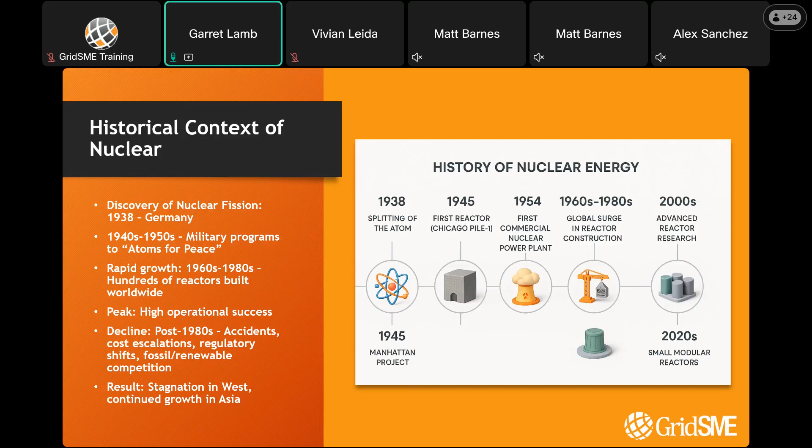So the current global energy landscape. As recent data from the International Energy Agency's Global Energy Review in 2025 shows, fossil fuels still dominate at nearly 60% of global electricity, with coal being the largest, but declining. Renewables hit a third, led by hydro, wind, and fast-growing solar. Nuclear contributes a steady 10% of electricity, but with record output in 2025 of over 2,600 terawatt hours.

Clean sources together reached two-fifths of electricity for the first time. Electricity demand grew over 1,200 terawatt hours in 2025, up 4%, far above historical averages, fueled by EVs, heat pumps, AI, data centers, and developing world industrialization. This creates urgent needs for reliable, low-carbon baseload, which is exactly where nuclear power excels and why it's needed in today's power grid.

Nuclear's comeback is driven by interlocking crises: climate science and regulations that demand slashing emissions per the Intergovernmental Panel on Climate Change, or IPCC, pathways that rely on low carbon and firm power.

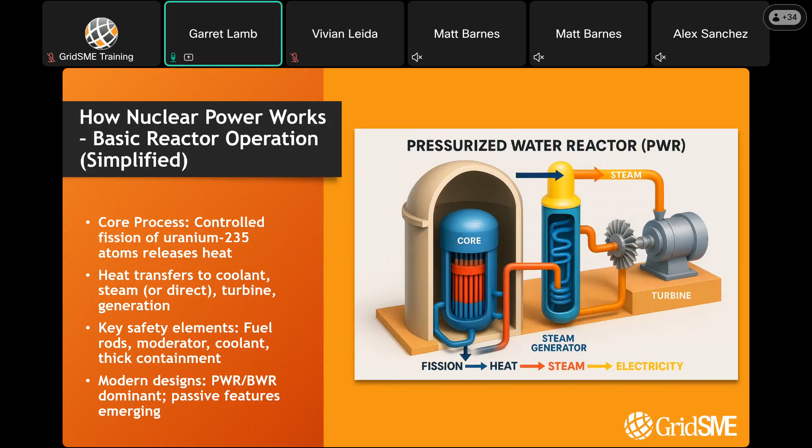Okay, so the advantage in climate emissions. Nuclear's full life cycle emissions, which include the mining of uranium, construction, operation, and decommissioning, are extremely low. Recent data puts nuclear at 5.1 to 6.4 grams of CO2 per kilowatt hour.

When related to the IPCC's median threshold at 12 grams, this is far below coal at 800 plus grams and gas at 490 grams, and pretty much similar to wind that generates 11 grams, while edging out solar PV at 45 grams. In many scientific studies, this accounts for everything from fuel supply to waste management.

Nuclear has collectively avoided massive emissions by displacing fossil generation. It's a proven on-demand decarbonization asset, which is essential for electrical generation across the globe.

And many of you are probably thinking, why is the emission so high on renewables? Well, it's the entire spectrum and life cycle of creating these plants. To build solar farms, to build wind farms, there's a lot of diesel, a lot of concrete—there's just a lot of emissions that are emitted in the construction as well as the operation of these systems that a lot of people don't take into account.

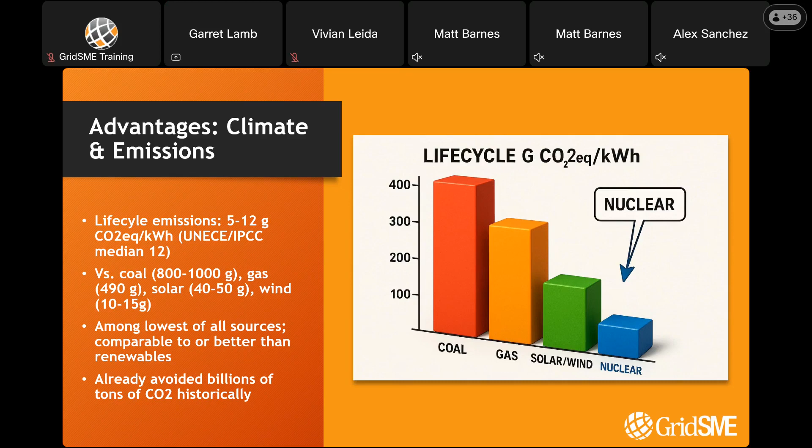Because I had the same questions—why is wind and solar so high in the grams? But it's the construction costs, it's the emissions that are put out in the construction and what's emitted to create these plants. Hopefully that makes a little more sense as to why the emissions even on wind and solar are a little bit higher than once thought.

All right, so the advantages of reliability and baseload power. The capacity factor measures actual output versus the maximum possible. This is where nuclear generation truly excels.

Globally in 2025, nuclear averaged 83%, up from prior years, with North America at around 90%. U.S. plants routinely hit 92 to 93%, as they are the most efficient in the world, which is far above solar, ranging around 25%, or wind, which is between 35 to 40%.

This means nuclear is a near constant power source, independent of the weather, and allows it to provide essential baseload, reducing reliance on backup solutions. High factors translate to more electricity from fewer plants, enhancing grid resilience, which differs from the variability that renewables face. Nuclear power is not affected by wind, sun, or night - it's just a constant source. As long as the fuel rods are in the water making heat, you're going to have power generation. That's pretty much what it comes down to.

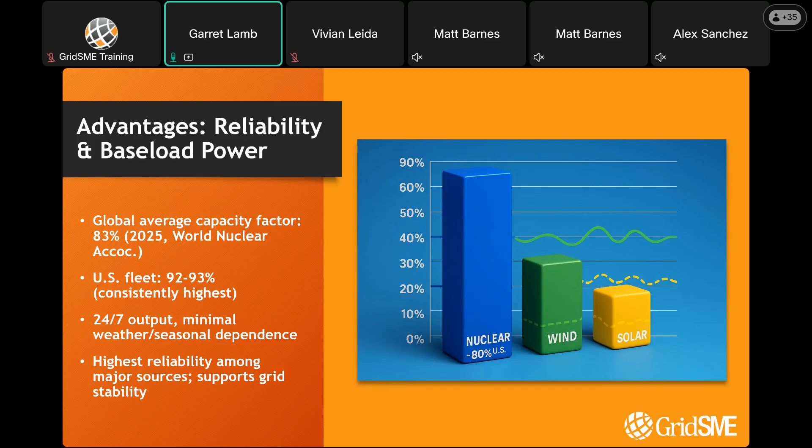All right, so some big advantages: energy density and land use. Nuclear's fuel is incredibly dense. One uranium-235 pellet is equal to 1 ton of coal in energy output. So what they're saying there is basically it takes 1 pellet of uranium-235 to produce what a ton of coal will produce. So a ton of coal has the same energy mass as 1 pellet of U-235.

Nuclear's land footprint per terawatt hour is tiny compared to solar and wind. This efficiency means nuclear plants fit on smaller sites while delivering gigawatts of generation, avoiding large-scale land consumption that also impacts biodiversity, farming, or other uses of the land. Nuclear is ideal for land-constrained regions, higher density areas where land is fairly scarce. It just takes up far less land, doesn't need as much real estate to create as much, if not more, power than wind and solar does.

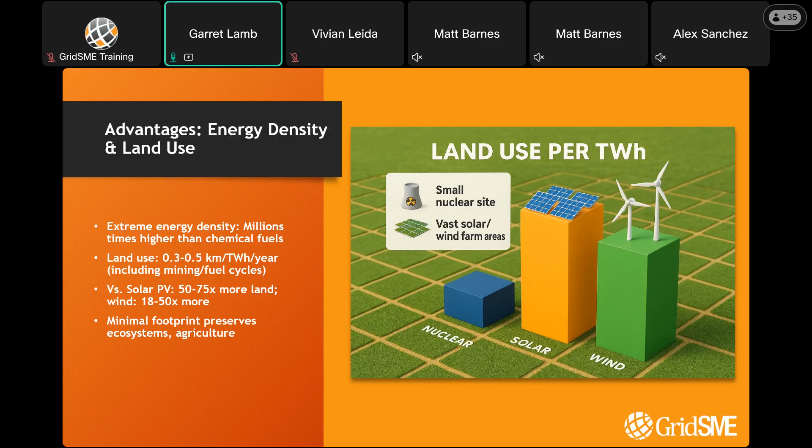Okay, so some economic advantages: there's job creation, manufacturing, supply chain development - all of these come into play. Nuclear generation projects create many well-paying jobs, including engineers, technicians, welders, and many other positions, often leading to between 500 to 1,000 jobs during the construction phase alone, and hundreds of permanent positions after plant completion. These projects also drive manufacturing of pressure vessels, turbines, and supply chains.

Nuclear plants operate between 60 to 80 plus years, which provides decades of economic activity and predictable low fuel costs. Local economies benefit not only from the energy produced by the plants, but also by the tax revenue and infrastructure upgrades. So not only does it help with cheapening power, it also provides economic growth for the community and surrounding areas.

So energy security and independence. Unlike oil and gas that are tied to volatile regions, uranium is an abundant source, with Australia, Canada, and Kazakhstan as top producers. There are many years worth of nuclear fuel across the globe, and nuclear consumes its fuel much slower and at a much more efficient rate than fossil fuel generation. Nations across the world can stockpile uranium for decades. This shields economies from price shocks and supply disruptions, as we've seen in the oil and gas industries due to their volatile up and down spikes.

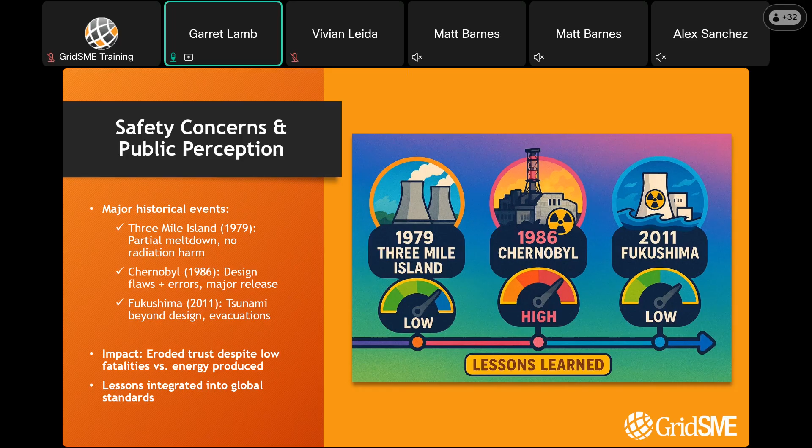Modern safety features: Gen 3 and Plus reactor designs incorporate passive safety and core cooling through natural forces if pumps were to fail. There are multiple redundant systems and robust containments in place to prevent radioactive releases, employing defense in depth layers such as fuel cladding, vessel, and building to ensure failures stay contained. These features make core damage probabilities lower than older nuclear plant designs.

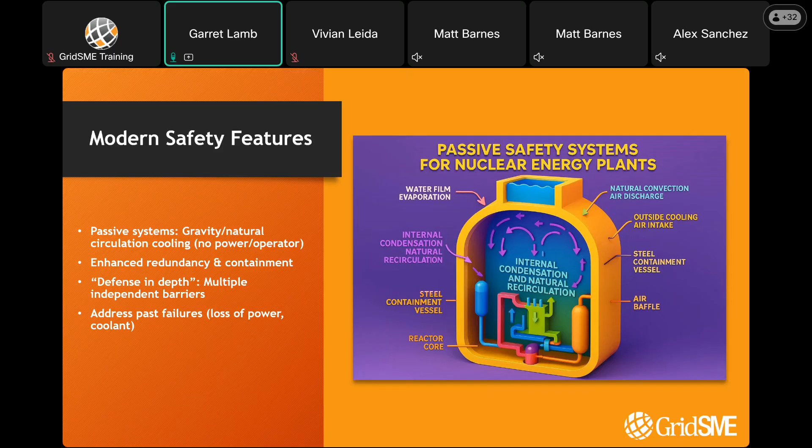The passive safety systems for nuclear energy plants, as you can see in this diagram, is contributed right off of those lessons learned from the three events we talked about in the previous slide. There's steel containment vessels, reactor cores isolated, internal condensing water, and water film evaporation. It's a more contained, enclosed, more efficient, safer reactor.

The dry cask was actually designed at a New Mexico laboratory to harness all of the radioactive material created down at Los Alamos. The dry cask has a sealed inner liner with fuel rods sealed inside their inner cylinder, forming a fuel assembly. This is a really safe, robust way to store energy.

Nuclear waste from nuclear power plants is much different than weapon grade uranium, in that it's not enriched half as much as weapons grade uranium. So the radioactiveness is nothing near weapons grade radioactive, even though that is kind of the public perception. It's quite a bit different.

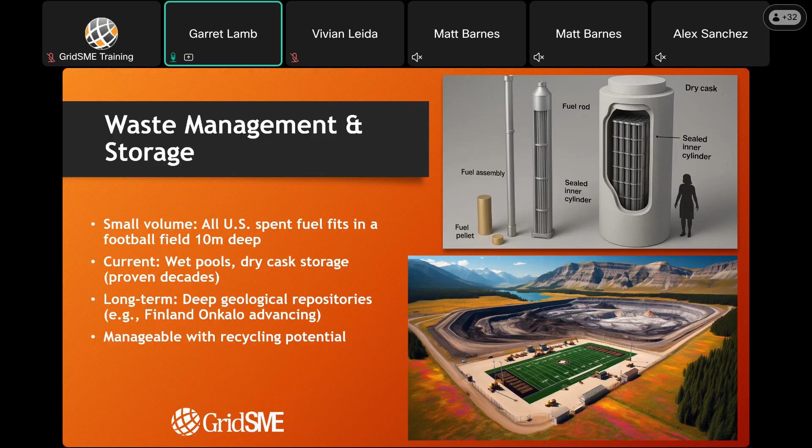Some economic challenges: the biggest barrier is upfront capital, with constructing plants costing billions per plant, with multi-year construction amplifying financial costs. Delays from supply chain, regulation, or first-of-a-kind issues usually lead to overruns in cost.

This contrasts with modular renewables, which have much faster deployment. Some solutions include government-backed loans, standardized designs, and moving towards small modular reactors, known as SMRs, to reduce risk. We'll talk about those a little more coming up. But that's the big thing that drives nuclear costs.

There's a lot of economic challenges as far as cost, but there's also a lot of permitting, policy, and environmental impacts. The timeline is the biggest issue, capital is the second largest issue, and then fuel costs relatively nothing. Once these plants are built, as far as generation is concerned, it really costs primarily nothing as a fuel source. You still have overhead costs, employment, salaries, operational costs, but the fuel itself is relatively low cost.

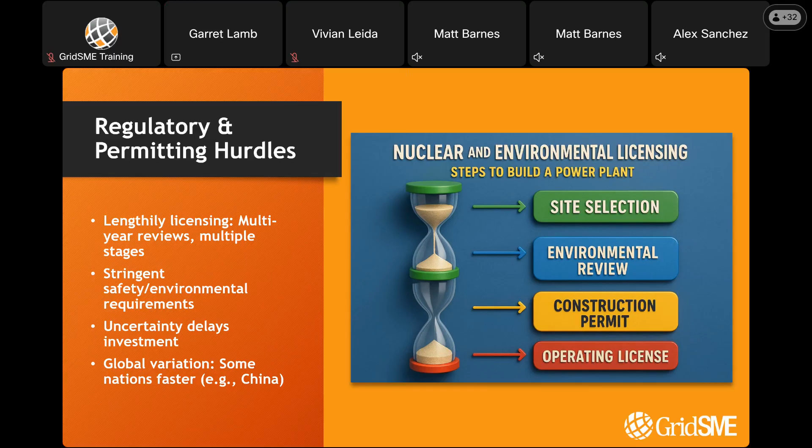Okay, so small modular reactors.

Small modular reactors, also known as SMRs, shift the traditional method of nuclear plant construction by moving towards a more streamlined process where the SMRs are built in factories, such as cars. They're shipped and assembled on site, which leads to cutting time, cost, and risk.

So for example, they're built in a factory, they're shipped out for construction. It's a lot easier to relatively control costs and keep things from overrunning as much. You have your set price for the SMR itself, and you'll have your construction cost. It's pretty much all within a bid process versus going through and building traditionally.

The big thing is with traditional plants, you have anywhere from 5 to 10 years where you have to go through permitting and costs. Within that 5 to 10 years, inflation and all kinds of different things can overrun original thoughts and costs, which leads to overruns no matter how well you try to budget it. A factory-built, relatively quick and efficient method like SMRs would definitely help with the cost, the speed, as well as the deployment.

So the smaller size allows incremental additions that suit grid or off-grid uses. Many tech companies have invested in SMR technologies as a viable solution to power their power-hungry AI and data centers. The United States has several projects such as NuScale, TerraPower, GE, Hitachi, and Westinghouse, just to name a few, with many others continually emerging, helping to advance widespread global interest.

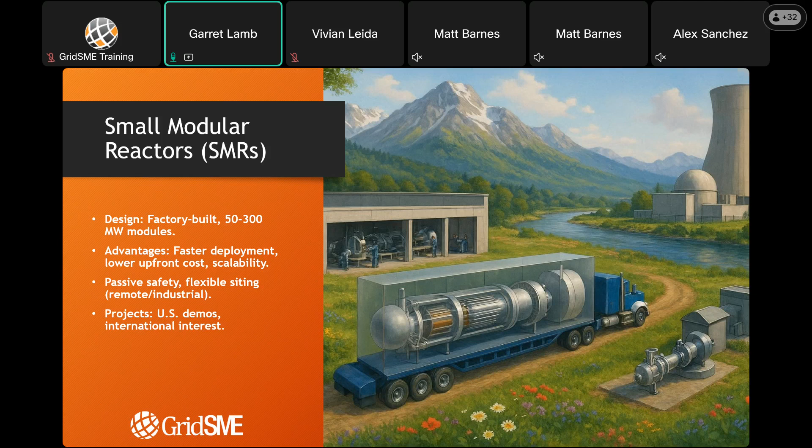All right, so advanced reactor designs.

These are considered the Gen 3 plus reactors, and it builds on decades of experience with major upgrades such as passive cooling, severe accident resistance, and simplified layouts that reduce parts and costs. New plants like the AP1000 demonstrate this.

There's been a lot of research, a lot of technology, a lot of scientific and physics work that has gone into a lot of those constructions. The Idaho National Laboratory, for instance, has spent lots of time working on these with the United States military for their aircraft carriers and submarines. That's kind of where the idea for SMRs came from.

It's been a technology that's been taking place, even though you haven't heard a lot about it in the media, just because nuclear's had this stigma around it that it's not safe, that it's scary. However, the technology has been evolving in the background heavily. It's never stopped. It's just a resurgence coming now due to the new technology, a better way to add base load, a better way to make sure it's safe, and better perception to the public.

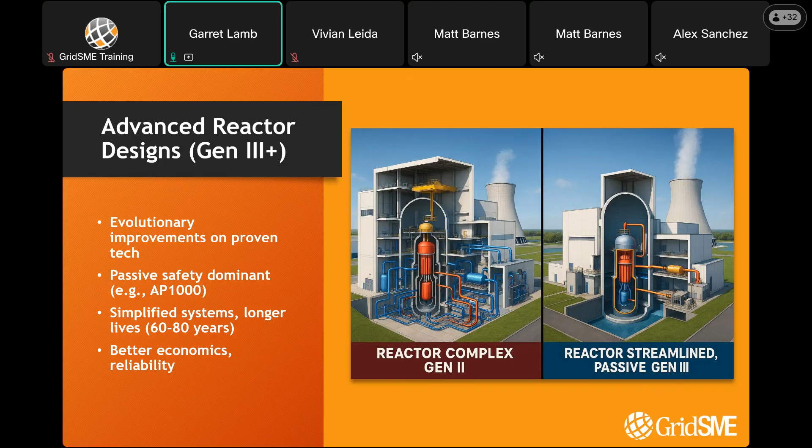Carrying on, so generation 4 and experimental reactors. There's also been a lot of talk about the next generation experimental reactors that could even be higher efficient, basically reduce waste to almost nothing. They're fast breeder fuel, which is molten salt, potential sustainability, and they still are much more in development, but the technology is getting even more advanced to what we have right now.

So the Gen 4 reactors aim beyond the fast reactors that breed more fuel than consumed. So in essence, they're creating just as much energy as they're consuming. It's just a cycle of give and take. Molten salt designs operate in extremely high temps for efficiency and safety, with liquid fuel reducing the potential meltdown risks. These new type of reactors could recycle their own waste and extend resources.

There are a couple of experimental designs right now that are being looked at from TerraPower and Moltex, just to name a few, who have made significant progress towards this deployment. It's still at the experimental stage, still a lot of science, still a lot of R&D that's going into it, but it is interesting. It's really cool that there's still more innovation to come with nuclear power versus the major innovative jumps that we've made so far.

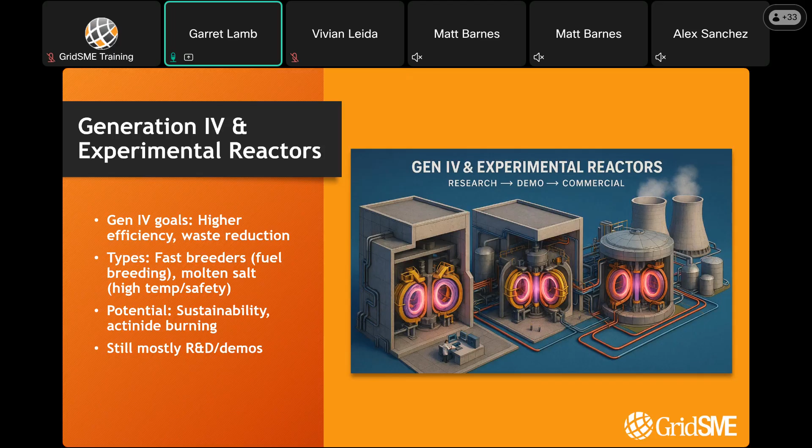Okay, so fusion energy. So fusion fuses light atoms like the sun. There is no chain reaction risks and minimal to no waste. Projects like International Thermonuclear Experimental Reactors, known as ITER, aim for net gain while private firms accelerate research and development. This is a science, fusion has been something that has been really highly talked about.

It's promising. There's a lot of science, a lot of research going behind it, and it's actually accelerating with new advancements every year. As of now, a realistic demonstration for one of these plants might be ready in trial runs as soon as the 2030s. However, with potential to be more like the 2040s.

So if this technology is determined to be successful and it can be harnessed and used, it could potentially lead to unlimited clean power, which is what the goal is. Now, if we get there, that would be great. This is still experimental. We don't know yet, but they are making great strides towards fusion energy and making it work.

So emerging technologies. Accident tolerant fuels, known as ATFs, can resist meltdowns in much larger accidents and much longer accidents, and also keep things from happening much longer than standard materials that have been used in the past. Additionally with these ATFs is new alloys and ceramics that can handle much higher temperatures.

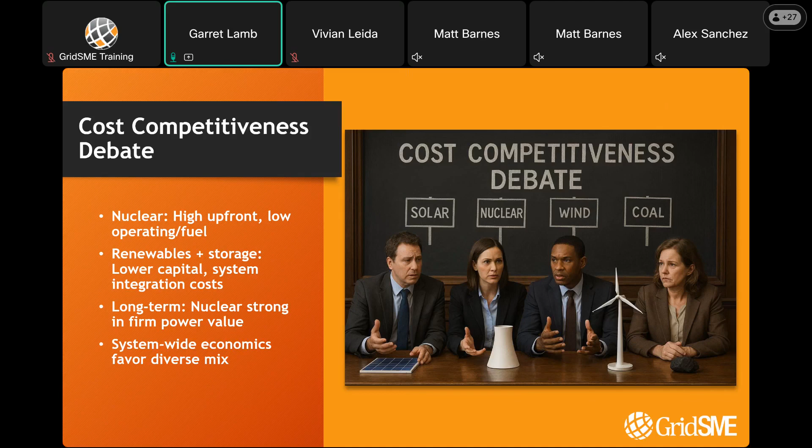So security and proliferation concerns: there are many valid concerns, but they are manageable. There are many concerns that go along with nuclear power. The International Atomic Energy Agency, IAEA, monitors nuclear fuel cycles and works to assist plants with much needed hardening against potential threats. So it's not just the companies working at it, you have the IAEA, OSHA, the Department of Energy, all of these players working to make nuclear energy safe. There's been a lot of lessons learned, and unfortunately they were not fun lessons to learn, but they did happen, and we did learn from them, and it's made us better today so we can make this technology more viable and safe and more readily available to add to the grid and the growing demand.

Today's advanced reactors often use proliferation resistant fuels. Across the world, many responsible nations are deploying and utilizing nuclear generation and are mandated to maintain strong controls. They're definitely highly regulated, and SMRs are going to be highly regulated too. It's not like someone can just buy an SMR and throw it in their backyard and say we're off and running. There's still stringent rules, procedures, laws, government overreach, all these things that will go into place with this as well. So it's not like SMRs are going to be anything that just anyone can go off and buy, there's definitely going to be a lot of regulations around them.